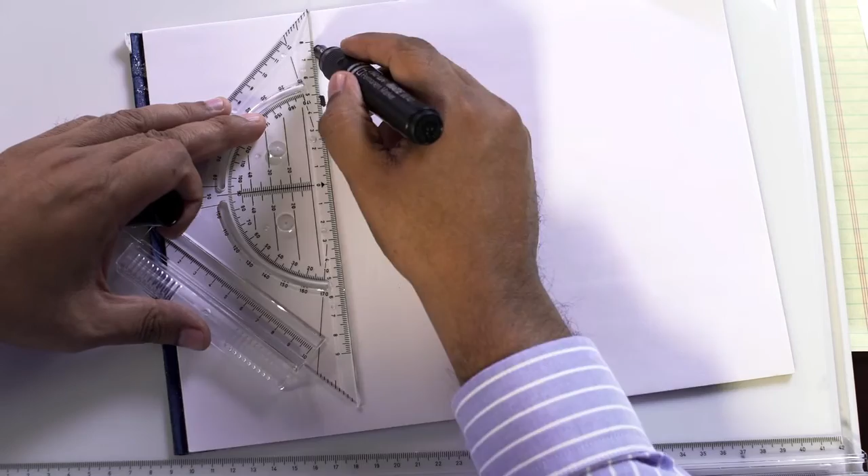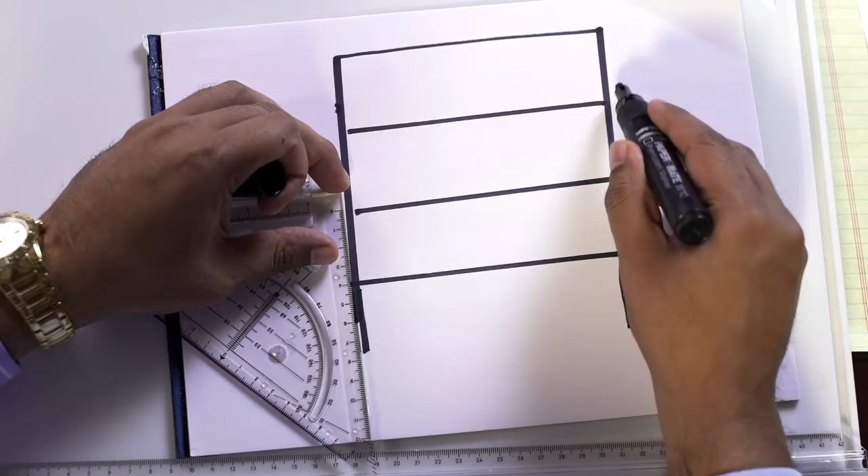If we take a look at a 3-story structure, which is normally like an apartment building or condominium structure, with 3 floors, and on the very bottom floor, which I'm calling the ground floor or first floor, that would make it a 4-story structure, but 3 stories above the ground floor.

The top 3 floors will have windows and doorways, and the bottom floor is usually what they call tuck-under parking. Tuck-under parking, which many of you are familiar with—you probably live in some of these buildings—is when the cars are parked underneath the structure.

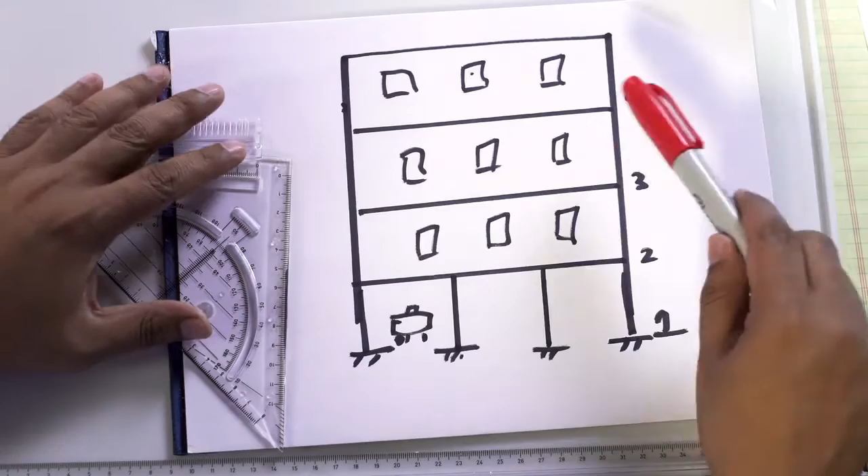Now the problem with this, what it creates, as you look at this diagram, is that you have a stiff structure on the top 3 floors, but on the lower floor you have these, I'll call them skinny columns. These skinny columns don't provide the same stiffness as the upper 3 floors.

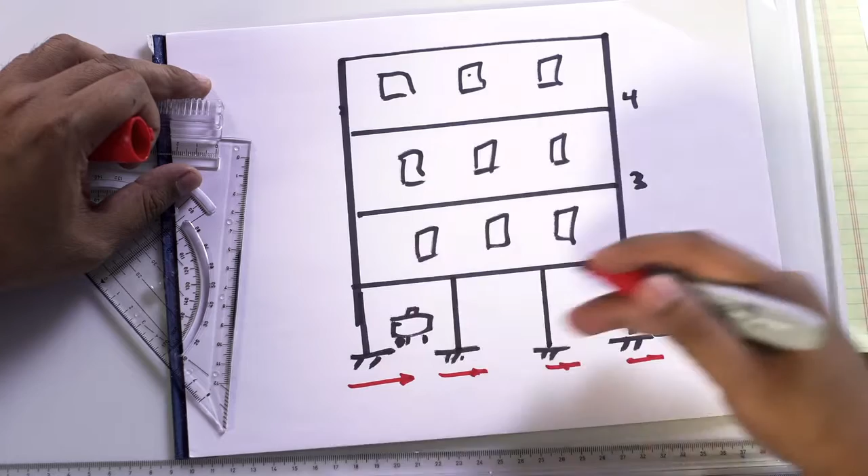So what happens is when we have an earthquake, using my red arrows here, and the ground shakes, this entire structure is going to deflect. When it deflects, all of these loads from the upper floors get transferred down to these columns. These columns don't have sufficient strength to carry those loads.

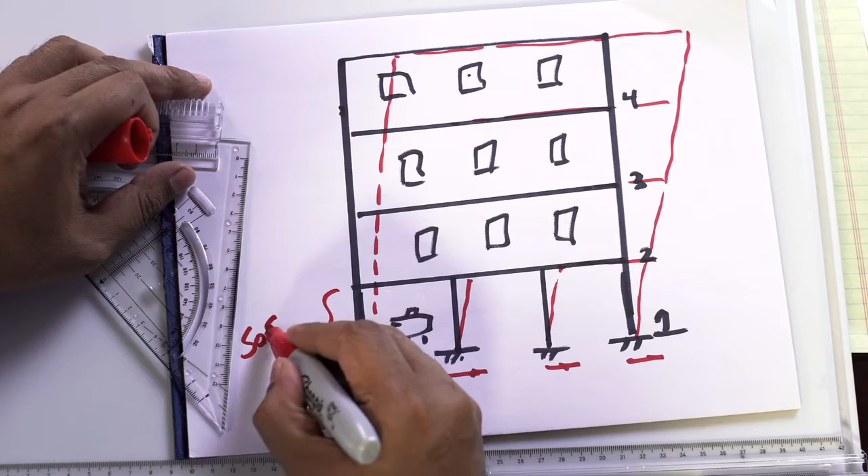This is the soft story. And what happens when you have a soft story? We've seen plenty of examples of them. It can be quite devastating.

It was a tuck under parking, and the upper 3 floors collapsed and crushed that tuck under parking. 16 people died at Northridge Meadows apartments. So soft stories are very, very dangerous.

We also have a very interesting video done by the Japanese Research Center, which tested 2 buildings, one with a soft story condition and one with a retrofitted soft story condition. Let's take a look at that video.

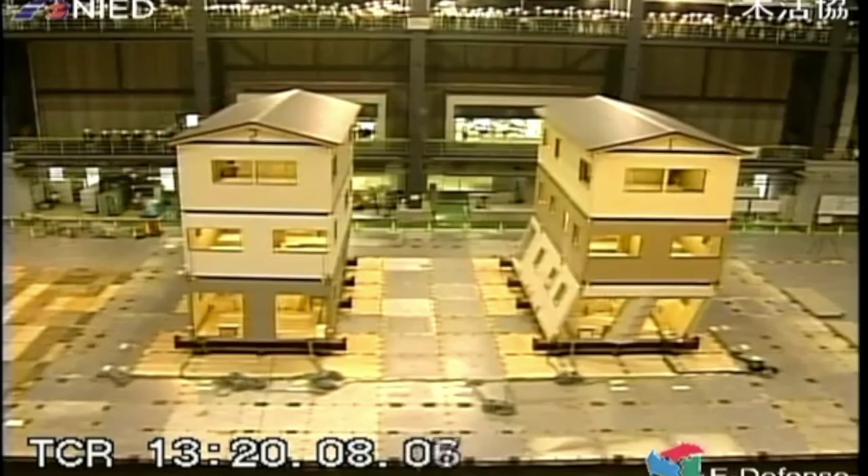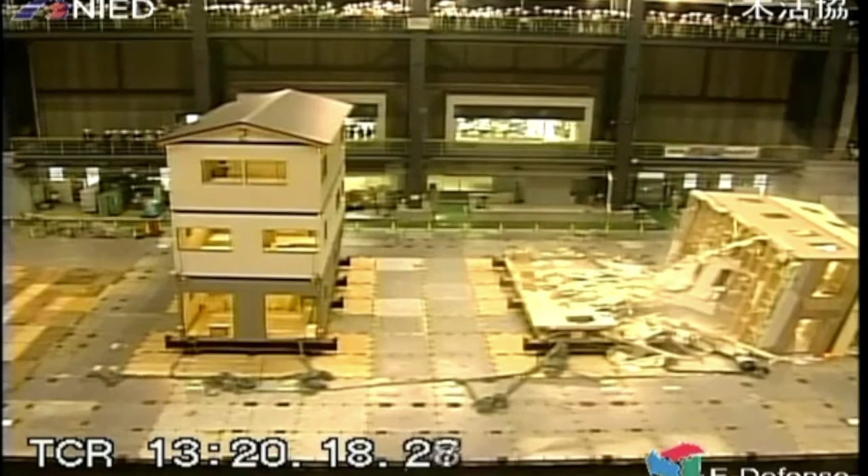So you can see from the video what happens in a soft story condition. The building with the soft story condition was a total collapse and it actually rolled over. The building that was retrofitted survived.

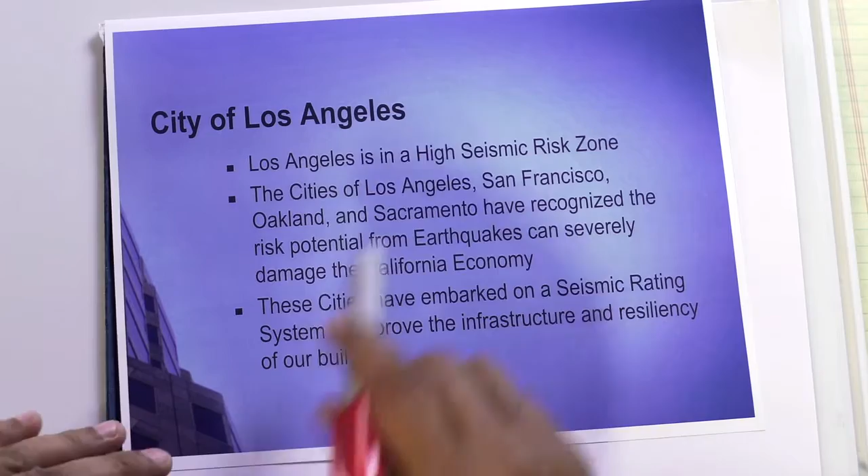So the city of Los Angeles is identified as a high seismic risk zone. We know that. We live in a seismic risk zone. We have thousands of faults. We have, on average, 2,000 to 3,000 earthquakes a week in Los Angeles, out of which maybe 99% of them are undetected because they're less than magnitude 3. But this is a very high seismically active zone.

So the cities that have critical seismic zones, which includes Los Angeles, San Francisco, Oakland, Sacramento, recognize this as a risk and collaborated together to develop the soft story ordinance. And so they have embarked on creating a seismic rating system and an ordinance requiring building owners that have this potential risk of collapse to retrofit their buildings.

It's a safety measure. The City of LA created the safety measure, and it's called the LA Seismic Retrofit Program, the Los Angeles Seismic Retrofit Program. And this handout, which is available — you'll see the link up on the screen — gives you the basic parameters and also tells the tenants in buildings like this.

With over 15,000 buildings affected, it's a fairly drastic ordinance. The timeline for implementing the ordinance is approximately 7 years. Let's go over the timeline.

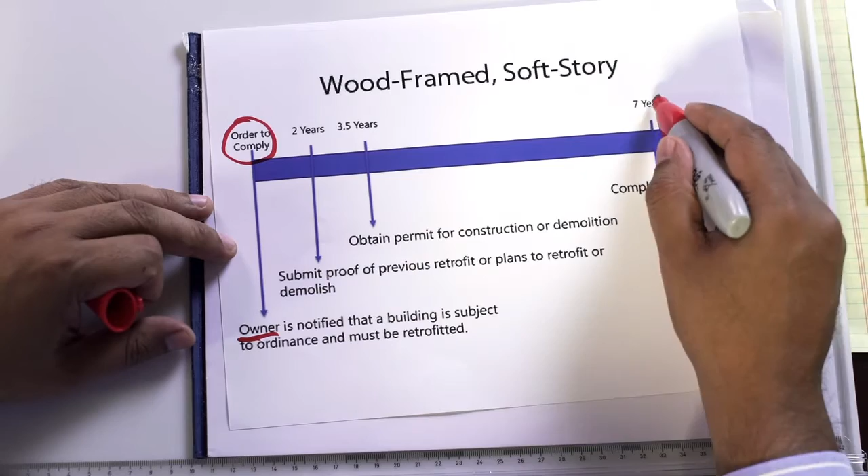So the building owner has, from the date of the order to comply, which is when they get the notice, 7 years to comply with the ordinance. In the first 2 years, they have to submit proof that they have hired an engineer and that they're in the process of retrofitting their building.

And the city's quite serious about this. The city will issue the order to comply, and building owners that don't comply will be subject to penalties. So it's a mandatory ordinance, and the tenants will be made aware. Order to comply will be issued, and it will affect the title of the property. So as a building owner, you've got to comply.

And that's what we're going to talk about today. We're going to talk about how to comply, the cost of compliance, and the different options that you have in order to meet the compliance.

Just as a matter of interest, so that I keep your interest throughout this course, I want you to think about this question, and I'll give you the answer at the end. Which is the safest structure best designed for earthquakes, tornadoes, hurricanes, nuclear attack, and terrorist attack? We have different classifications of structures: residential, commercial, hospital, police stations, fire stations. Think about that — I'll give you the answer at the end because I want to keep your interest. I'll tell you the safest type of structure available in the commercial space. We'll come back to that later.

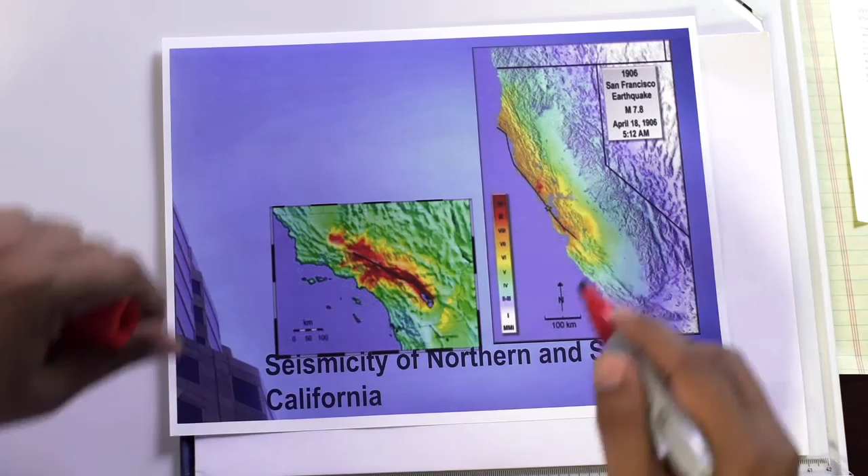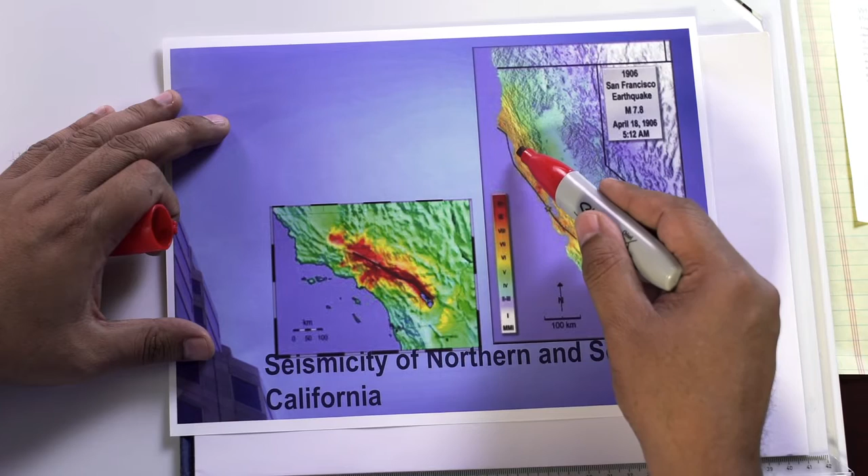So when we look at the seismicity of Northern and Southern California, we are in a high seismic zone. On the diagram here, you can see the San Andreas Fault, the red zones indicating the areas of highest seismic risk. That San Andreas Fault runs all the way from Southern California up through the Bay Area, cuts right through the center of the Bay Area, and then goes off into the ocean, where it keeps on going all the way up to Alaska.

The area south of the Bay Area, going all the way down from San Francisco to Los Angeles through Palm Springs, is one of the most seismically active zones in the world. There are literally millions of homes affected along that San Andreas Fault. We are only referring to, in today's lesson, the City of LA ordinance, but remember Los Angeles County has 88 cities, which are all in the same seismic zone, and many of those other cities will also be looking to implement a similar ordinance.

So this is going to be going on for some time, and this is the reason I wanted to post this session — so that I could help the public understand these issues and the technical challenges involved in complying with the ordinance and making your building safe. Why did they pass the ordinance? Well, obviously life safety is the #1 priority.

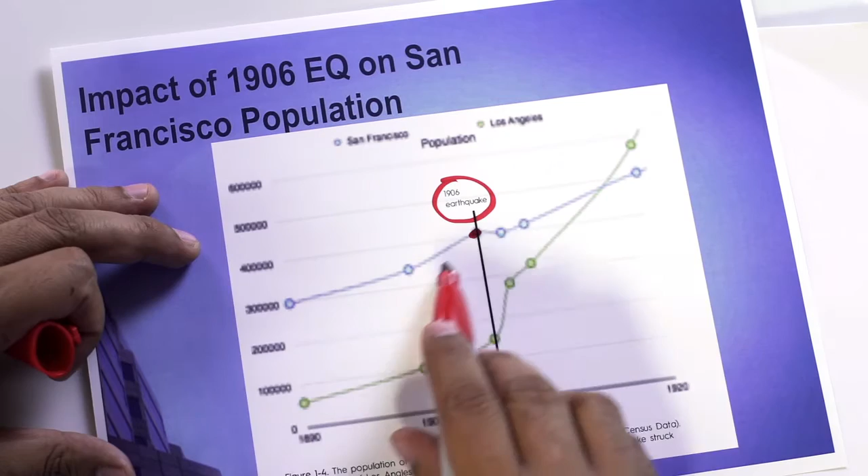The same thing happened in California in 1906. If we go back more than 100 years to the San Francisco earthquake, and look at this chart, you'll see that in 1906 San Francisco, shown by the blue line, was the most popular destination in California, not Los Angeles. Everybody was moving to San Francisco. Los Angeles wasn't even a third the size of San Francisco.

But when the 1906 earthquake occurred, San Francisco was wiped out, and it flipped the dynamics for the state of California. Southern California, Los Angeles took off, and San Francisco, to this day, more than 100 years later, has never recovered from that impact. So this is a very serious business.

It affects not just Los Angeles, it affects the entire state of California—Los Angeles, San Francisco, Sacramento, and the entire economic hub, with California being approximately the 7th largest economy in the world. It's a very, very serious matter.

So what are we going to do about it? I'm going to show you a couple more examples here, and then we're going to get down to the details. These are also examples from the Northridge Meadows apartments.

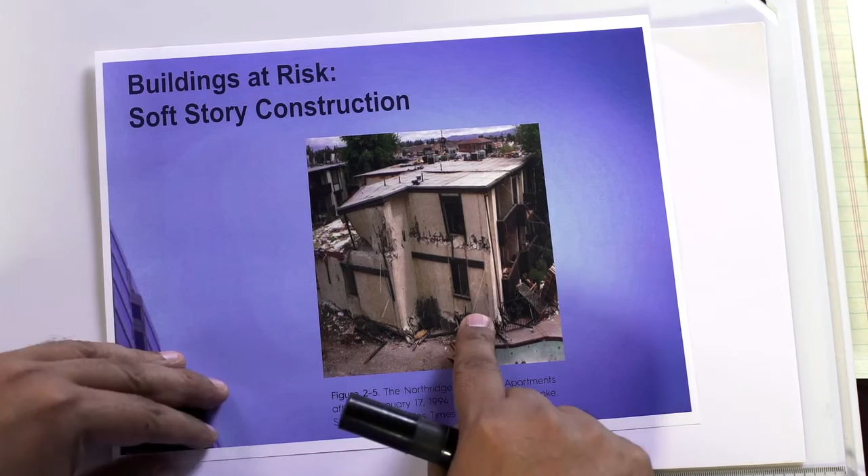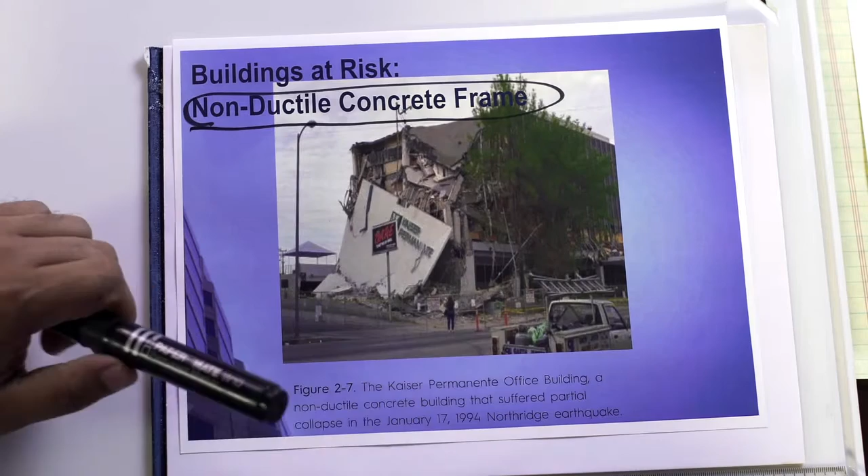There's another part of the ordinance which covers another type of building, called the non-ductile concrete frame building. We won't be talking about that today. That affects approximately 1,500 concrete buildings highly subject to earthquake risk. This will be the topic of another class—we'll pick it up next time, but that's another part of the ordinance that has also been passed. We'll save that for another day.

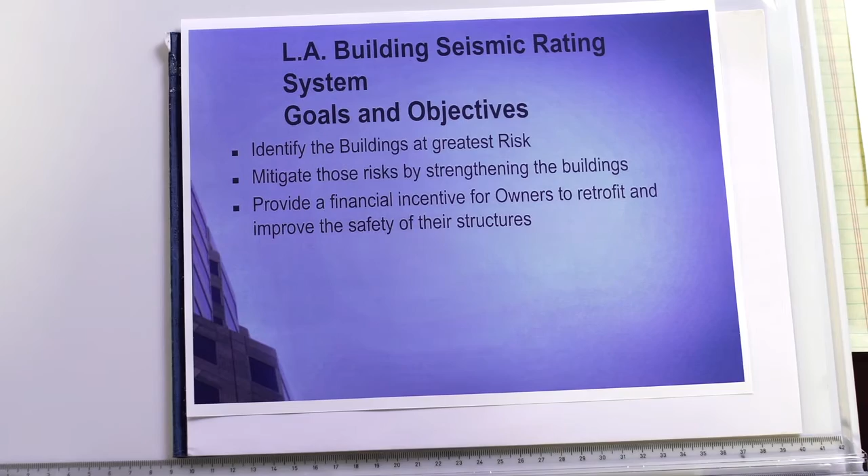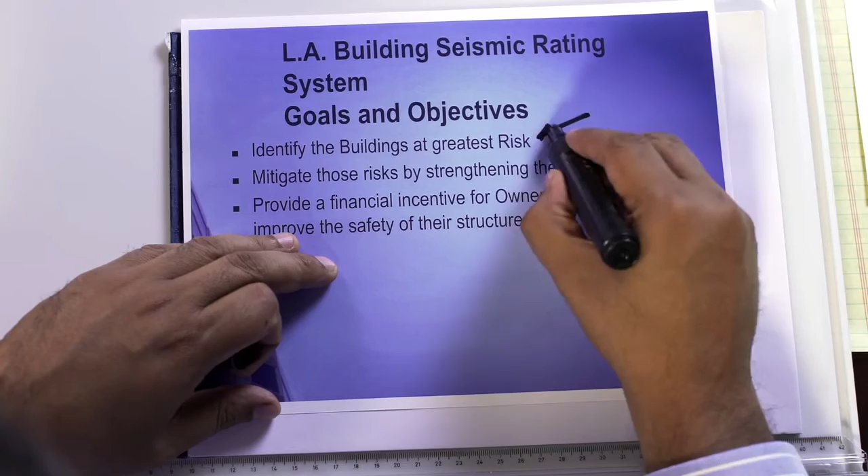So what are we doing in the LA Softstory ordinance? The first thing we want to do is identify all the buildings at the greatest risk. This step is being done by the City of LA—they are the ones going around identifying those buildings and then issuing orders to comply. When the owner gets the order, they then have to mitigate those risks by strengthening the buildings.

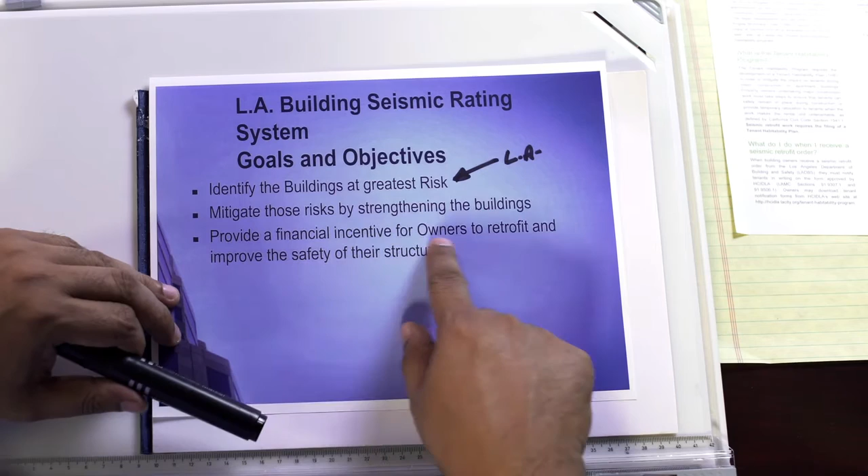The city is also trying to provide some financial incentives to building owners to help finance this or create tax benefits. That's a separate topic, outside the scope of this presentation, but there are some financial incentives out there. We're going to focus on this topic: how to mitigate. What do we do? How do we strengthen the building?

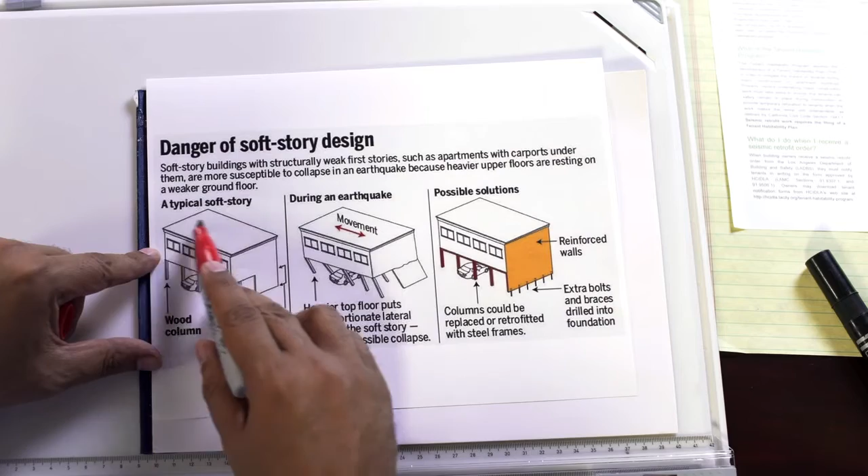Here's a great sketch, courtesy of the Los Angeles Times, which explains nicely in 3 dimensions what the danger is of a soft story. On the left you can see a building with a pretty robust second story resting on weak columns. This is very common in Hollywood and Santa Monica—many of you are probably living in these buildings. When you see this type of framework, that is potentially a soft story and a collapse hazard.

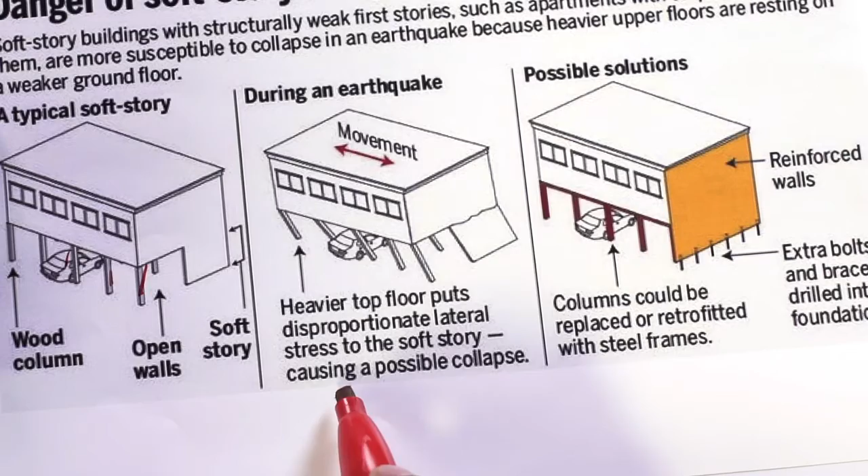In a fairly moderate earthquake, that entire building will collapse. You can see that illustrated in the second portion of the figure, which shows that under lateral movement, that entire floor will come down. And obviously, if you have 2 or 3 or more stories up there, in a densely populated city like Los Angeles, the risk is even higher.

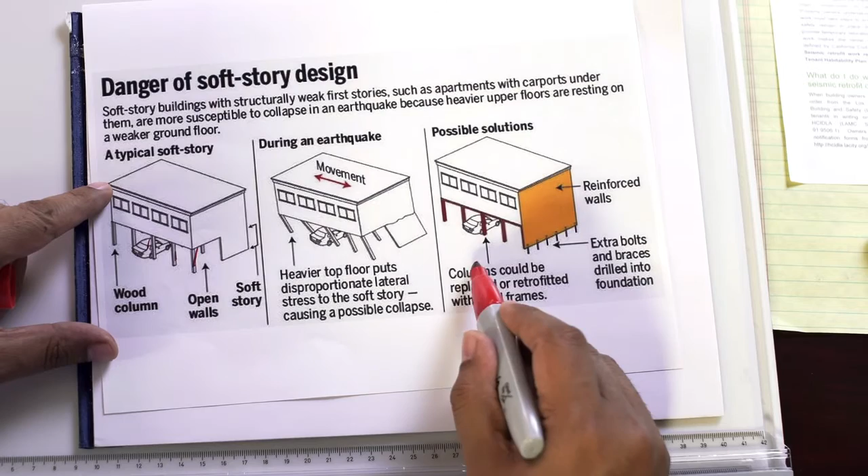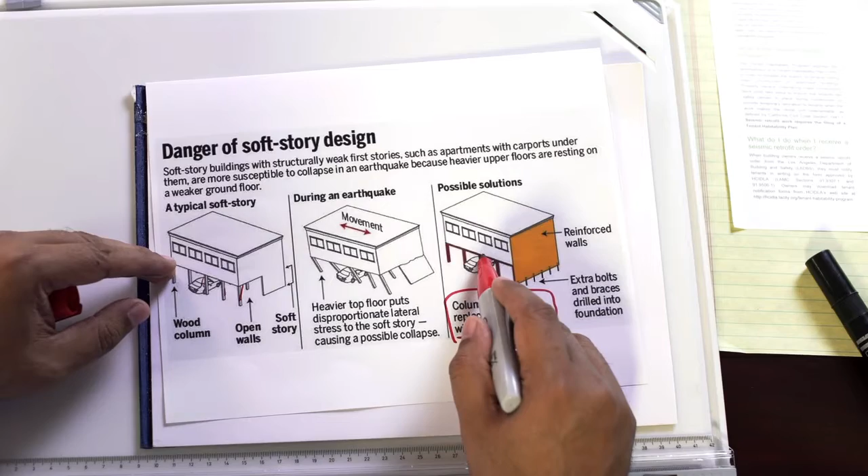So what do we do? The solution focuses on using strengthened columns—either steel columns, moment frames, or possibly shear walls—to strengthen that lower floor so it doesn't have a weak stiffness line and doesn't collapse. So what we're doing is taking these existing columns and either replacing them or upgrading them.

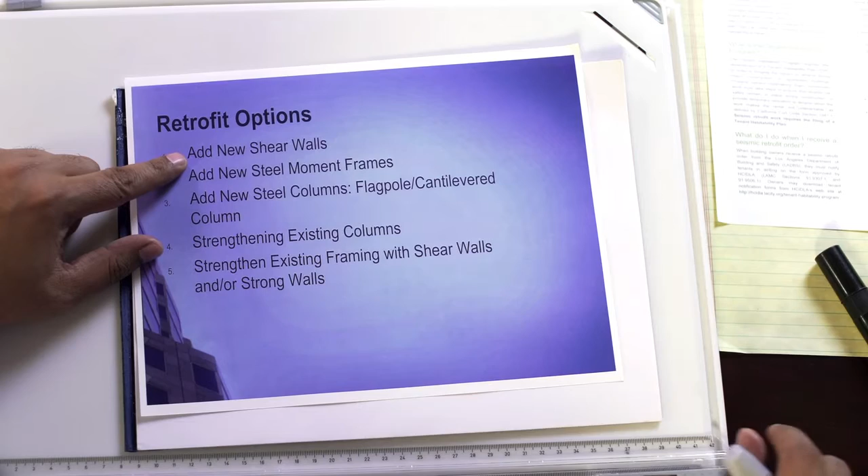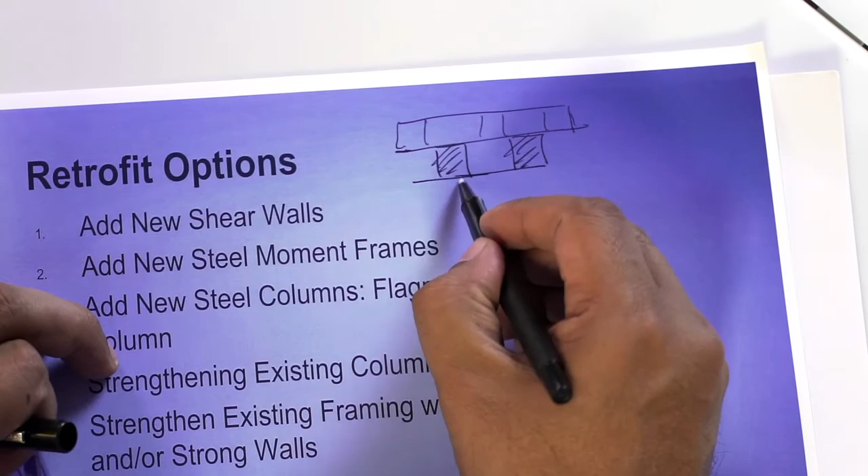So what we're going to do is come in with our solutions. Here are the options. One option is to add new shear walls. A shear wall is essentially a wall that comes in to supplement the stiffness on the ground floor, with your upper floors up here, and that creates higher stiffness. It's basically strengthening using a wall.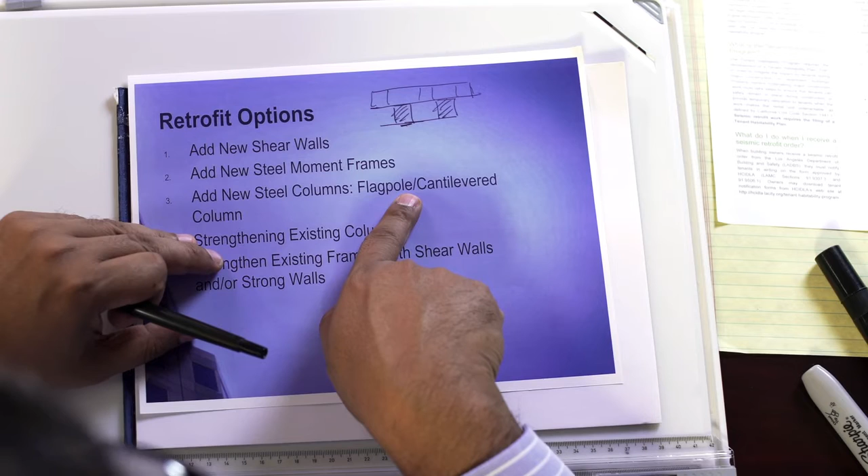Another idea is to use a steel moment frame, which we'll talk about in a second. We can also add new steel columns, which we call flagpole or cantilevered columns. We can also strengthen the existing columns—if it's already steel, maybe we don't need to replace it, maybe we can strengthen it, box it up and create a tube. We can also strengthen the existing framing with shear walls and/or strong walls.

So here you have five options, and it depends upon your structure, what the logistics are, and how many floors there are. The first step is to examine the structure, do a feasibility study, and try to see which option is the most cost effective.

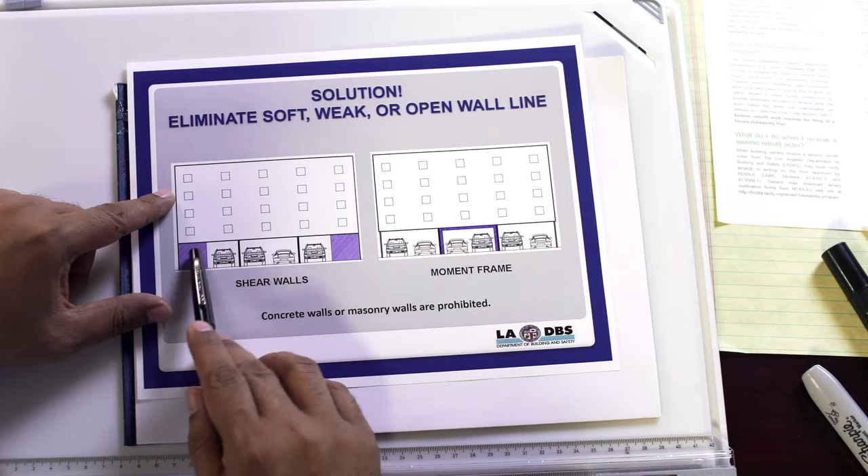For example, let's say we're looking at a hypothetical example: four stories over a soft story. In this example, two solutions—one is to put in two shear walls, the other is to put in a single moment frame. What's the problem with the first one? It's most likely going to be cheaper, but the problem is, as you can see, you lose parking. That's the problem with shear walls.

They take up the parking, and no tenant likes to lose their parking. As of right now, parking is sacred property in Los Angeles. Nobody wants to give up a parking space. So usually this is not a viable option unless you happen to have an apartment building with excessive parking. I haven't seen it, but I'm sure there's a few out there. So usually I don't recommend the first option, or it's not going to be accepted by ownership.

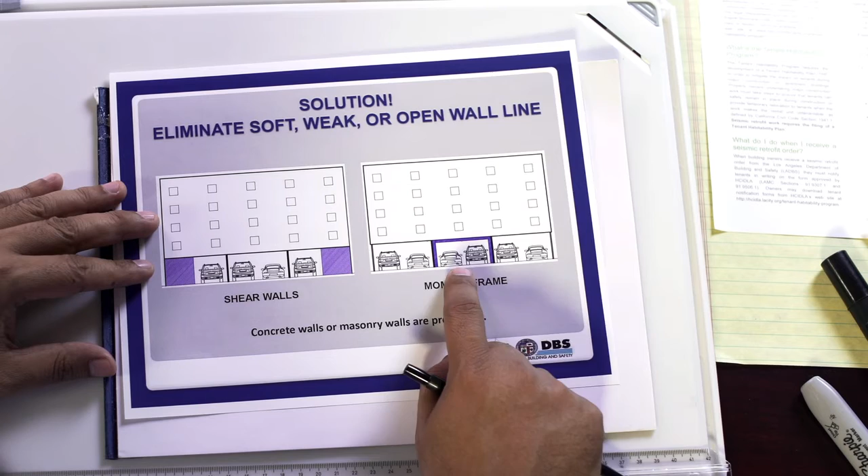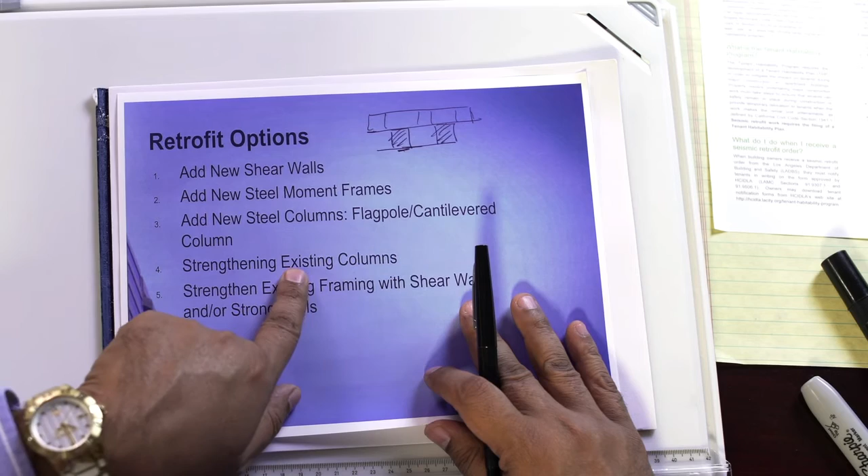The second option is a good one, but I want to go into the details of putting a moment frame in—it's a lot more involved than just what this drawing shows, and we'll explain that in a moment. Going back to our other retrofit options, we can also put in steel columns, which we call the flagpole, or strengthen existing columns. Let's talk about the steel moment frame.

Steel moment frame gets a lot of attention, and I want to explain what it is. A steel moment frame is a combination of columns and horizontal beams that are rigidly connected at the joints. What do we mean by rigidly connected? Let me try to explain that with a simple sketch.

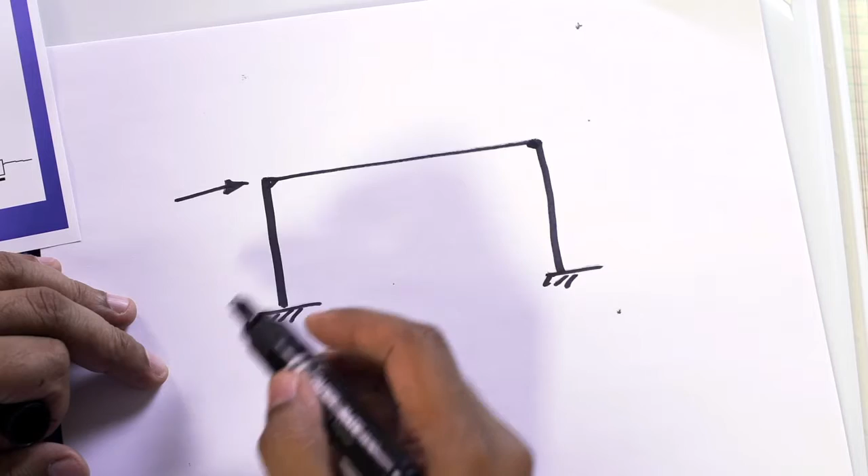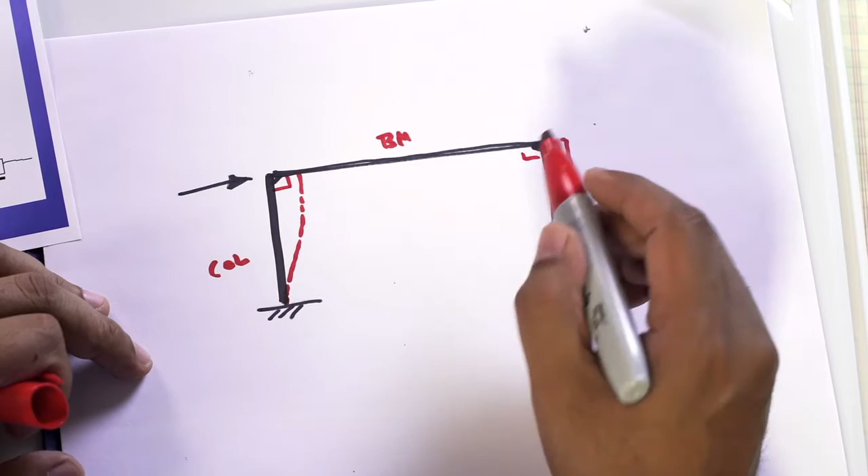If I have a frame made of steel, and I apply a load on the side, if these are rigid connections—which they are supposed to be—and everything is made out of steel, when this deflects, it's going to deflect in a way that the angle between the beam and the column always remains at 90 degrees. In other words, there is no rotation. The fact that there is no rotation means there's a very high bending stress occurring on those beam-column joints.

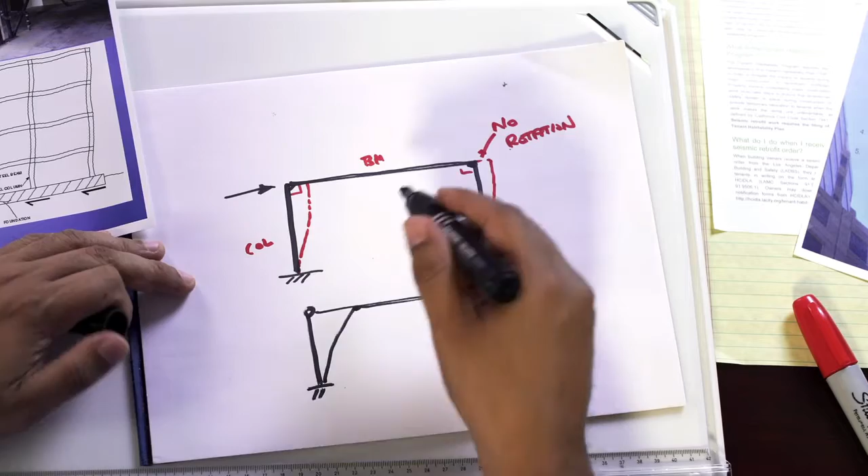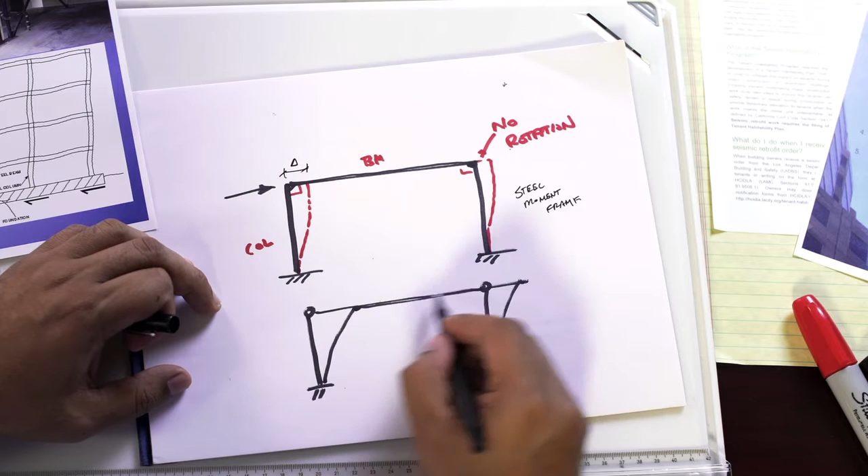As opposed to a hinged connection—if we allow rotation, the frame would deflect like this. Then it's no longer a rigid frame, it's pinned, and it will deflect like this because it's allowed to rotate. What's the difference between the two? This one, a steel moment frame, will have a shorter deflection—it's much stiffer. This one, without a moment frame, is a cantilevered column, and will have a higher deflection. It all depends on whether or not the building can tolerate the higher deflections.

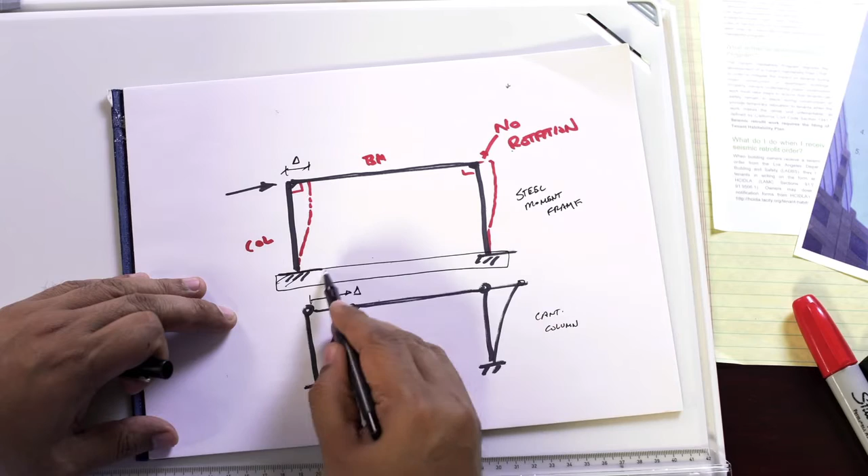The steel moment frame requires a grade beam that has to be dug inside. There's a whole concrete beam that has to go in there. And this connection is a very, very detailed connection. It requires welding, it requires bolting. It's more expensive, but it's the best solution, I will say that. From an engineering standpoint, you can't beat a steel moment frame, but it is also more expensive.

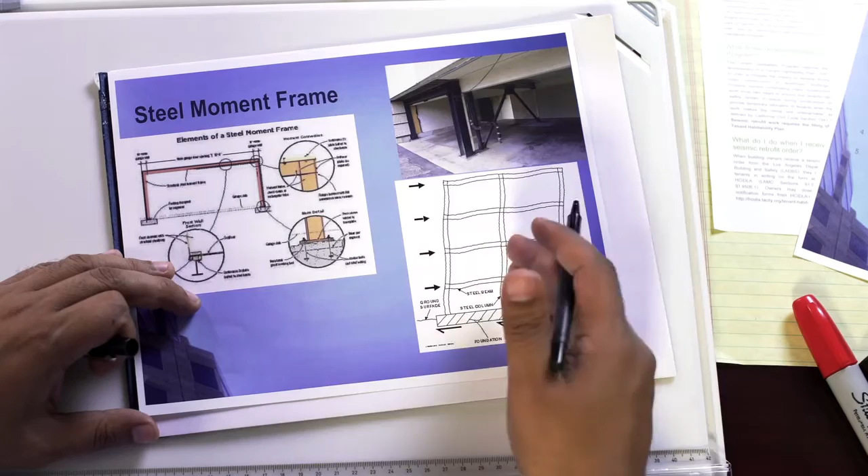The cantilevered column, shown on the bottom, can be designed with a footing. It's a cheaper solution, in my opinion, easier to install, but it has less stiffness. Now the question is, in terms of stiffness, what do you need? If it's only a one-story building, we may not need a steel moment frame. Maybe we can do a cantilevered column. So there are multiple options.

And the same thing applies when we go to looking at these other choices. So let's look at the wood shear wall.

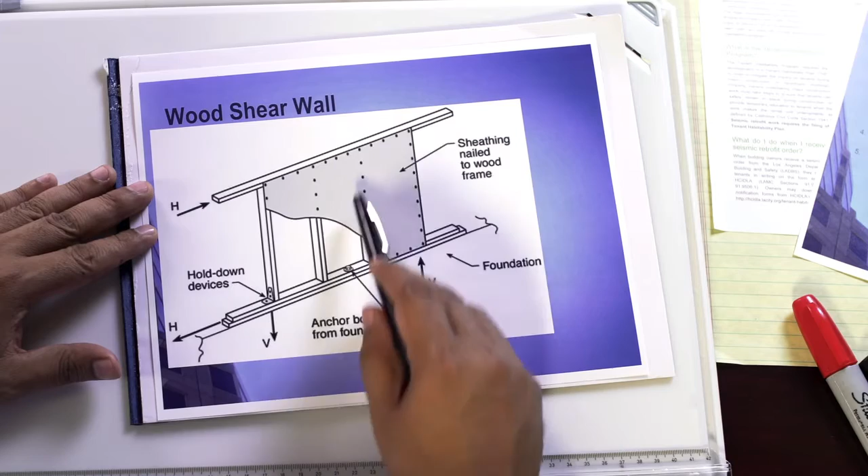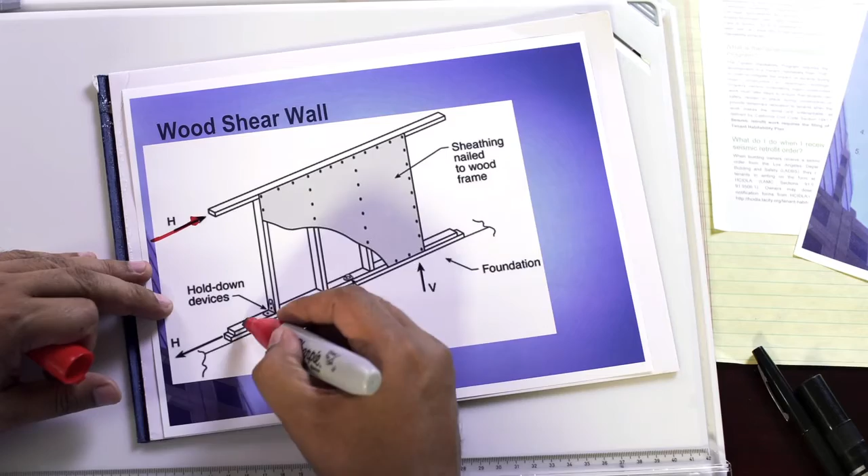A wood shear wall is essentially a system of studs with a top plate and a bottom plate with plywood sheathing. What does a wood shear wall do? When you put the plywood sheathing and apply this force, the plywood sheathing, which is nailed to the stud, prevents the shear wall from deflecting. It's as simple as that. If you didn't have the sheathing and just had the studs, the wall is less stable. You apply the load, the studs will just bend. But when you put the sheathing on, it ties it all together, creates a panel. And that's what a shear wall is.

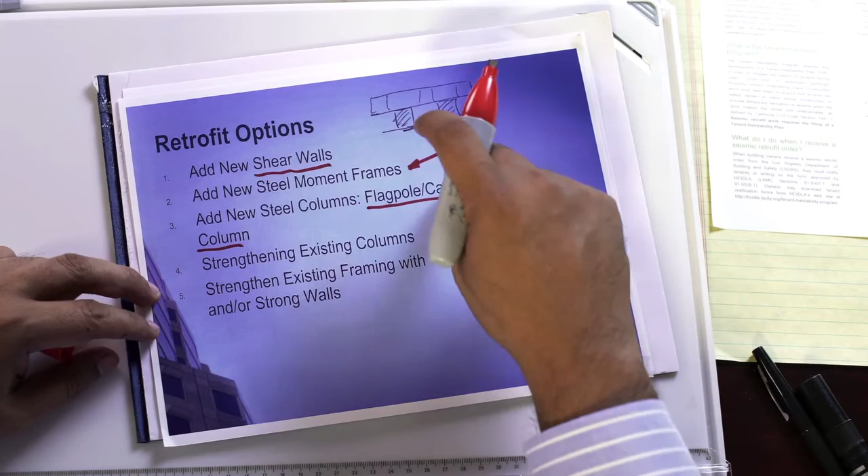Shear walls versus moment frames, which ones are stronger? No question, steel moment frame, much stronger. Shear walls are the weaker. The flagpole, the cantilevered column, is equivalent to a moment frame, definitely stronger than a shear wall, maybe a little bit more expensive. What about the fourth option, strengthening existing columns?

What do I mean by that? Let's talk about that for a minute. So let's say your building has some steel columns already in place. Usually those columns will be in the form of I-beams. They'll look like this. So maybe when we look at your building, we find that the steel columns are already there, but they're not big enough.

Well, we can come in and weld new plates on the side of that steel column. We can also weld new plate on the stronger side, and we can box that in and create a new column, which is much stronger than the original column. So it's more than one option, and maybe the strengthening of the existing column works.

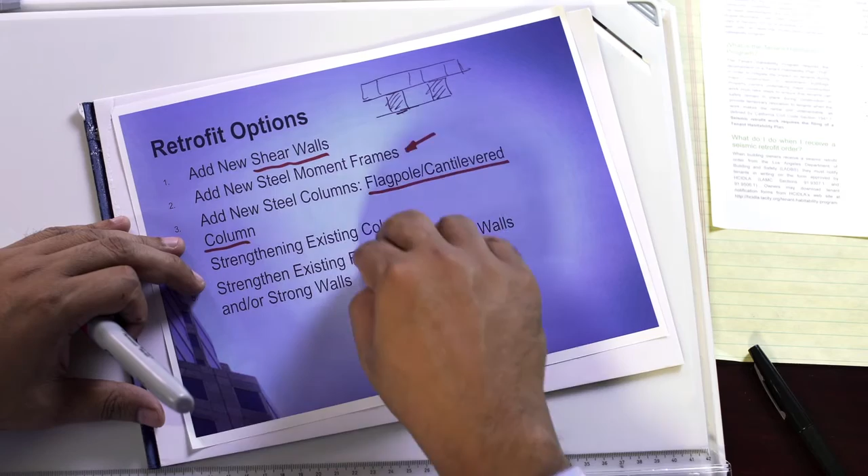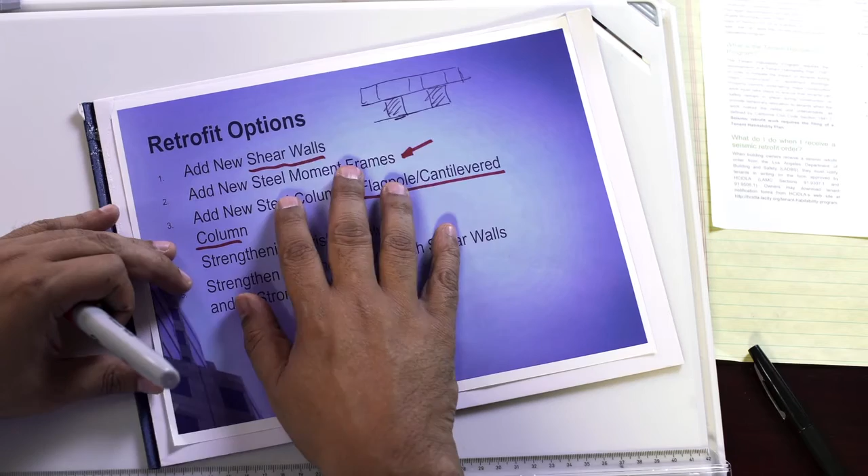Again, there's no one solution, there's multiple solutions. They apply to different cases, and the job of the engineer is to give you those choices and help you decide as an owner which one you can afford. I don't like to take 5 options and tell my client that they should do only one. I like to present maybe not all 5 options, maybe only 2 or 3 that I think are the best, and then let the client make the decision, because after all, you have to decide what you can afford. But I'll give you the best 3, and then you make your choice.

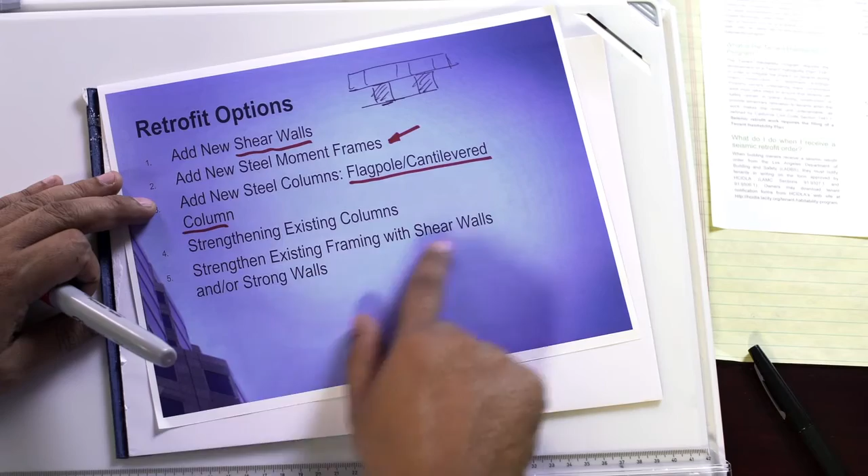The other option on the list is the strong wall. So we can also use adding a strong wall. What is a strong wall? A strong wall is essentially a shear wall, but it's a proprietary shear wall developed by a specific manufacturer, which has a super high strength and it's not as long.

In other words, this distance here can be as short as 2 feet. It can be as short as 18 inches. I think they even go down to 12 inches. So what does that mean? It means that if you have 12 inches to work with, you could possibly put in a strong wall. But as you saw with some of the slides we looked at, 12 inches may sound like a lot - it's about a foot - but you may not have a foot. In some cases, some of these columns are only 6 inches wide.

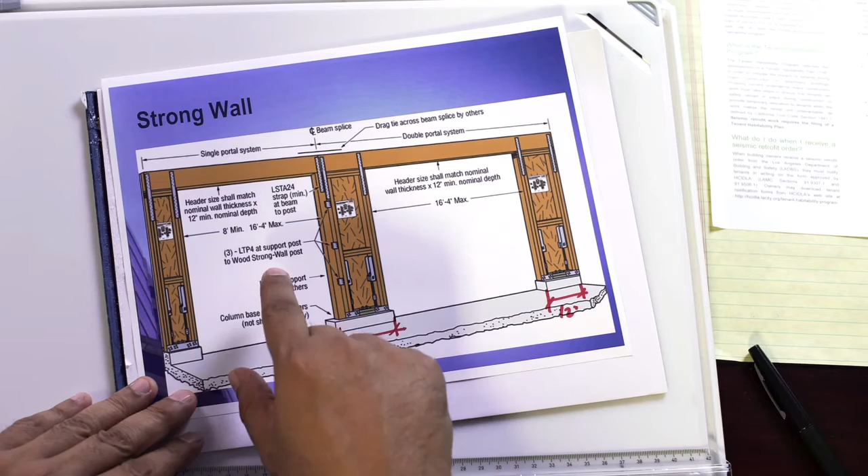If I put in a 1-foot strong wall, what have I done to my parking? I've lost my parking. And again, parking is a sensitive matter. So strong walls can be used in certain instances where if you have the length and you can do it, then by all means it should be considered. But if you don't, then you have to go with the steel moment frame or the cantilevered column.

So here's the question I get all the time. Every owner comes to me and says, give me a price. How much does it cost? I get this question all the time. And my answer is, it depends. I can't give you a cost. We first have to do some sort of analysis.

We have to do a step 1. I emphasize that because my role in this process is as an engineer, not a contractor. I mean, I am a licensed contractor, but I don't practice construction. My job as an engineer is to evaluate the building and give you your best option. Then you can go get the contractor of your choice, or I can recommend somebody who can give you the price. There are 2 ways you can proceed.

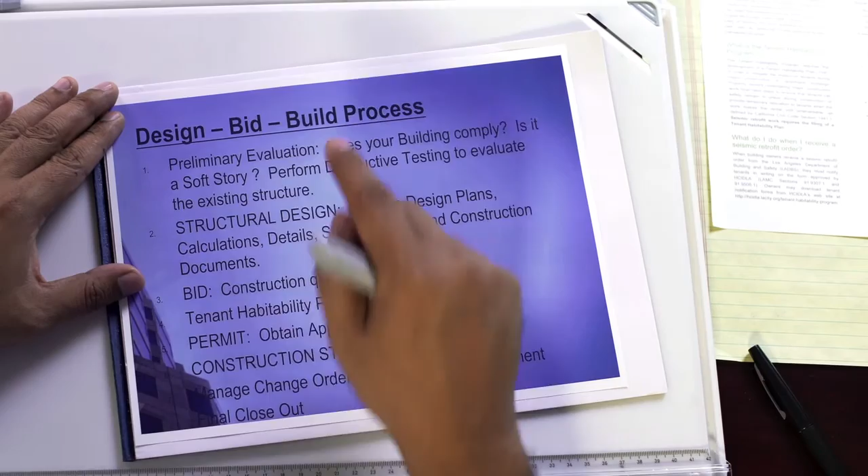The first way is what's called the Design-Bid-Build process. This is the traditional way. In the traditional way, step 1, we do a preliminary evaluation. Does your building comply? Maybe your building already complies. Just because they gave you the notice, it doesn't mean you necessarily have to do something, because it just means they're letting you know that you need to examine your building.

Is it a soft story? We have to do some destructive testing. We have to come out to the building. We have to cut some stucco. We have to see whether or not the columns are steel or wood. So we have to do some evaluation unless we have a set of drawings.

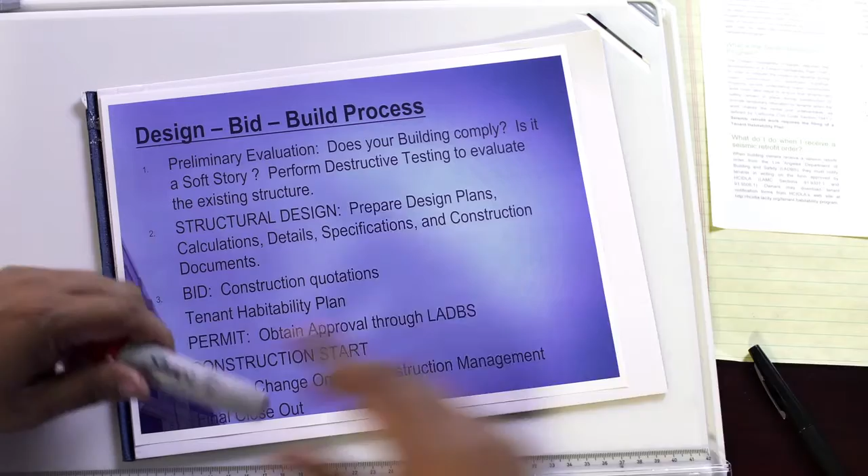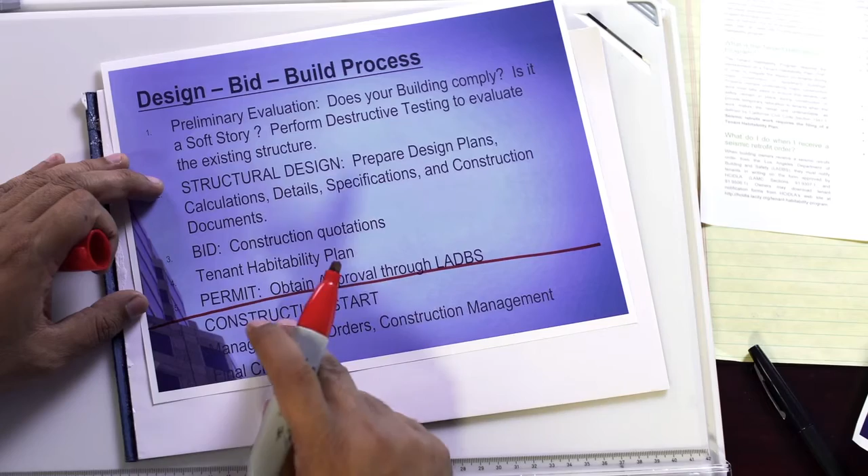Then we have to do some calculations. We have to see, going back to the 5 options, which one is going to work. Is there a 6th and a 7th option? So we have to do some engineering. We have to evaluate. Then, after we do the evaluation, you can come up with a cost. And then you can develop your tenant habitability plan, pull your permit, which we will help you with. At this point is where you retain your contractor and start with steps 6, 7, and 8, which is to engage the contractor and let the contractor go do what they do, which is to build it.

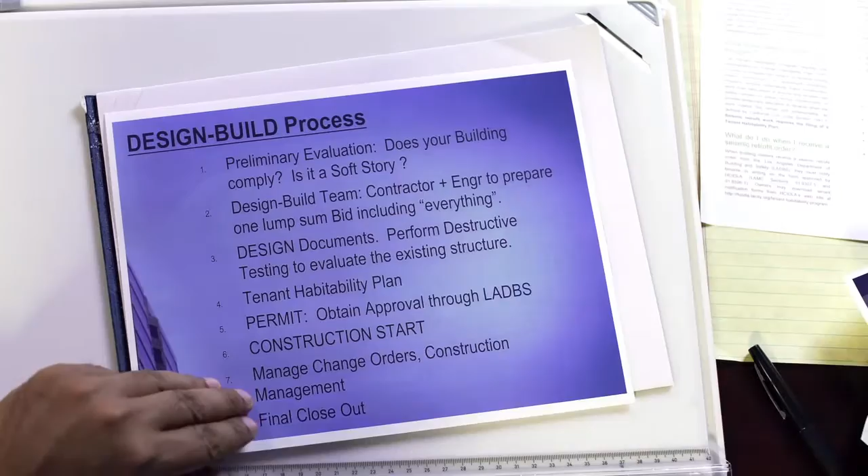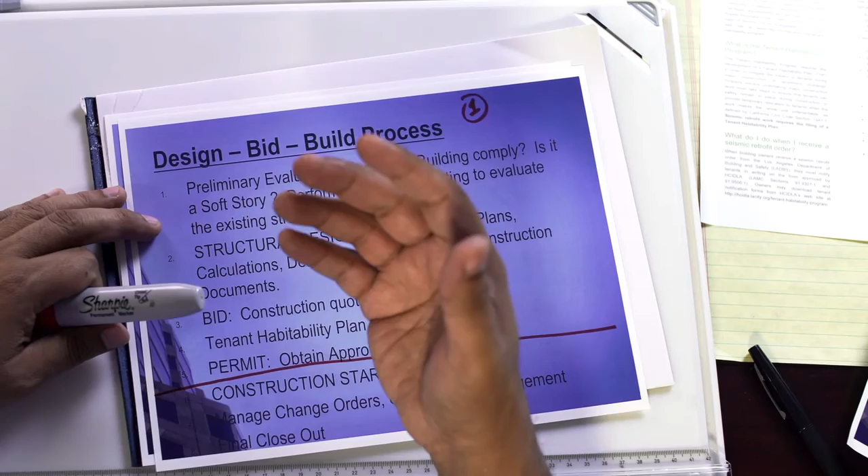This is the preferable option. This is what I recommend, option number 1. Option number 2, another choice. Some people don't want to take the steps of doing the evaluation, the structural design. Some people want a price, and they want it done now. So there are some companies, we call them design-build companies. This is called the design-build process.

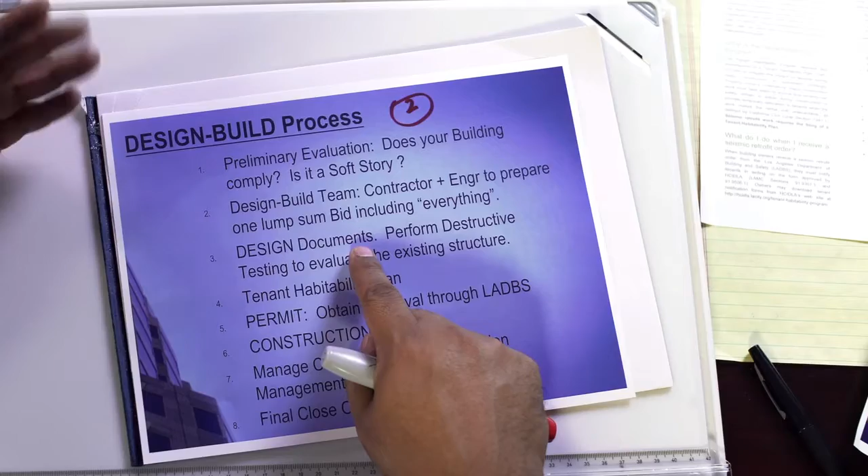The design-build process: they will do some sort of preliminary evaluation, but now the contractor steps in at the very beginning, and the contractor will bring in an engineer to prepare a design. So the initial steps of evaluation and looking at options is eliminated for the most part, and the design builder, the contractor, will then just come to you with one option, one price, and say, that's our price, that's our solution. And they will go straight to design documents. It's definitely a faster procedure, but my advice to you as owners and tenants is that you are then disengaged from the different choices. Sometimes this will work.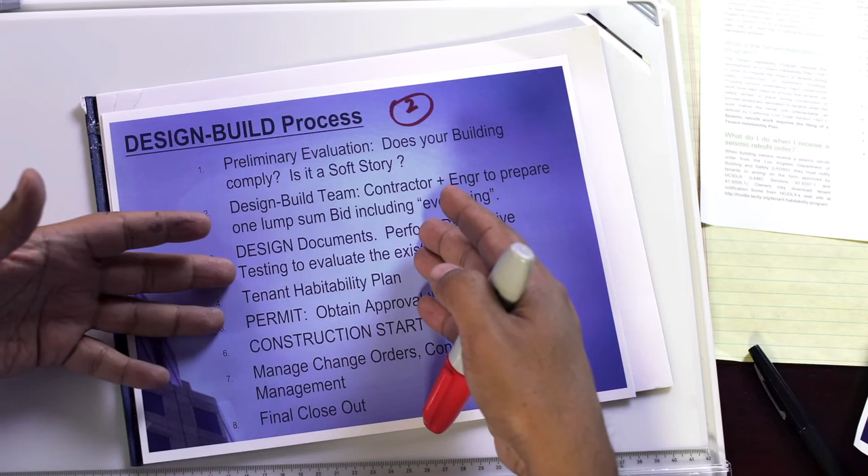I'm not saying it's a bad option. We've done it, we work with contractors, but I want you to be aware of the two choices, because there are a lot of people running around town who are offering only the second option. I want you to know there is a first option, and that you should, if you want to economize and create the maximum benefit, at least be aware of it. Again, you're the client, you're the owner, the decision is yours in the end.

What are the pros and cons between design build versus design bid build? Design build results in one price, but you can have change orders that may exceed the original budget, because in design build they may not have done the destructive testing. They may not have evaluated all the different intricacies involved with the plumbing and the electrical. In design bid build, it allows you to control the construction with better plans, design documents, and you control your budget.

I would highly recommend, especially for those with more than 20 units, get a construction manager. Don't try to do this yourself. This is not like adding flooring on your balcony or changing your sprinklers or doing plumbing in your bathroom. This is serious stuff. Get a professional. Get a construction manager to represent you. It costs a little bit more, it's a little more expensive, but he's a professional and he will represent you, and help you manage your budgets and your schedules.

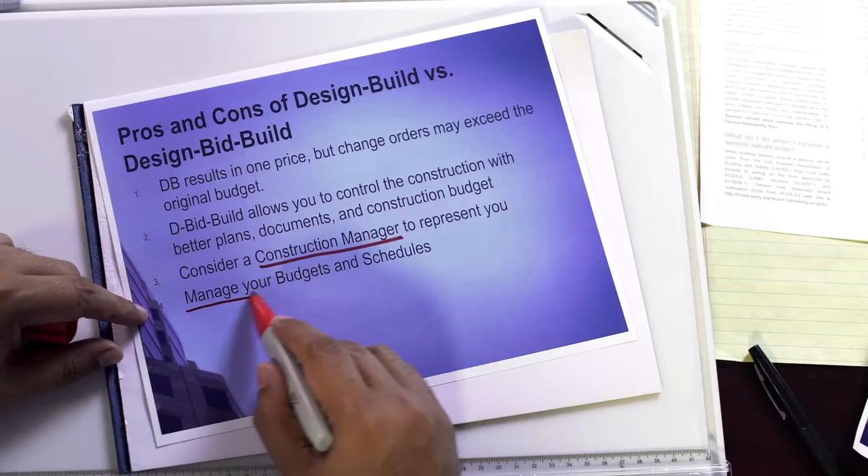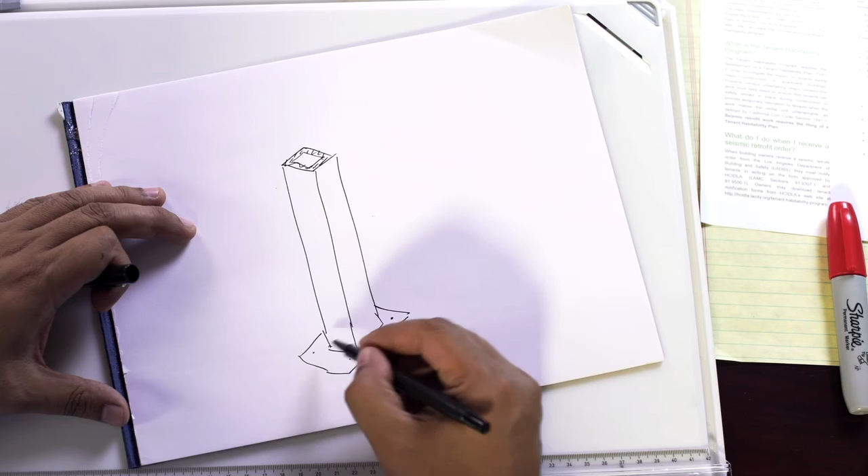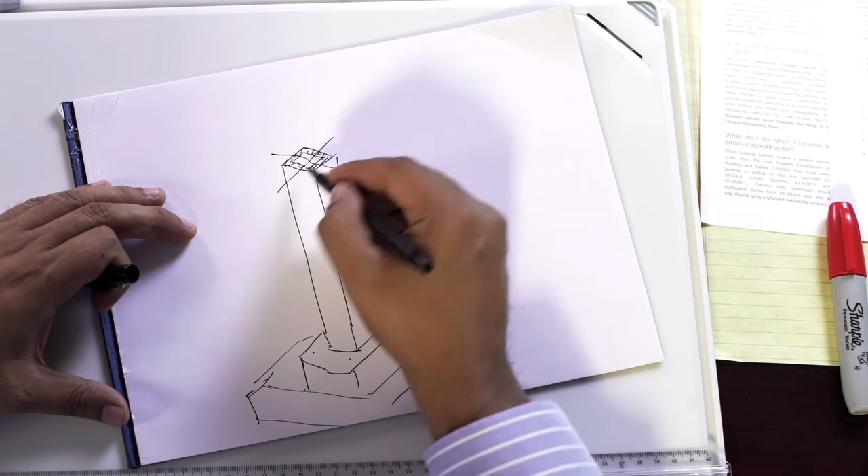So let's talk a little bit about the cantilevered column solution. What I like to use is what's called a structural tube. A structural tube is exactly what it says: a steel tube which is then connected down at the base with a steel plate with bolts that go into a concrete foundation. Why do I like this solution? Because the structural tube can take loads in both directions. It has symmetry.

It has symmetry, so when I do a design, and let's say I recommend an 8-inch by 8-inch by half-inch thick structural tube, I like that solution because I get strength in two directions. As opposed to doing an I-beam, a lot of people use the I-beam. The I-beam is strong about one axis and weak about the other axis. It does not give you the same strength in both directions.

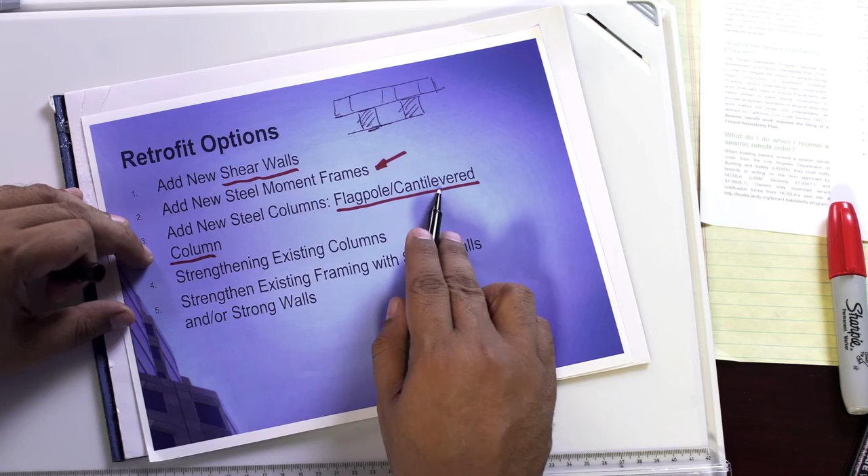So this is called a cantilevered column. It is one of the solutions we talked about earlier, the flagpole cantilevered column. Remember that you don't have to replace the column, you can also add the column and leave the original column in place.

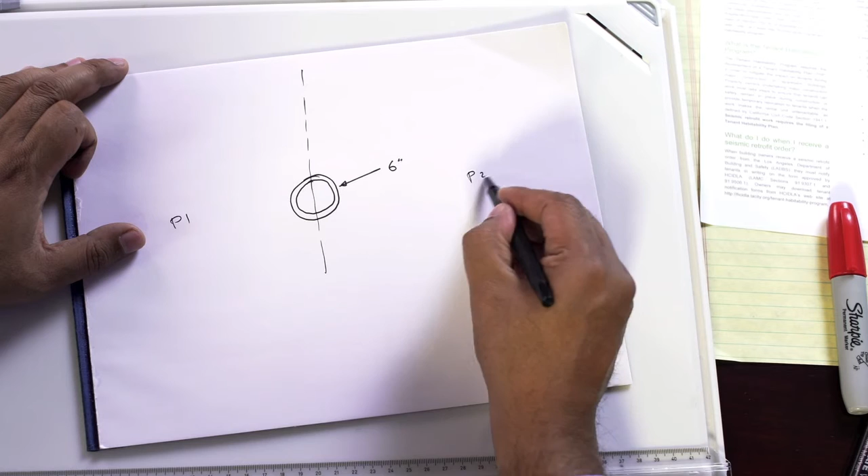The only problem with that is, let's say your existing column is a 6-inch pipe column, and here's your parking line, so you have a parking space here and a parking space here. If I take that column out and replace it with an 8-inch column, I'm only impacting it 1 inch on both sides. That's pretty livable.

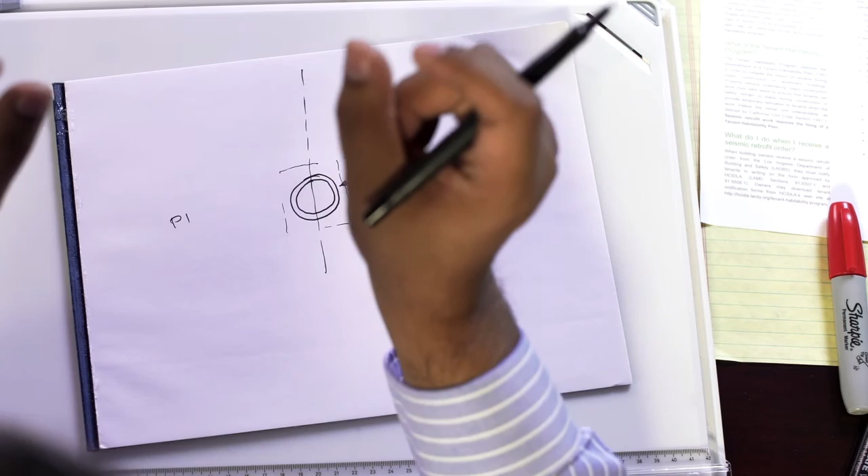But if instead of replacing, I add a new column, which is say an 8-inch tube, now I've created this area here, which is 6 inches plus 8 inches. I've created a 14-inch segment in there, which really affects the parking.

And so my choice is to replace, but again, construction costs are important. You need to get a valid price from your contractor, because I'm not the one giving you the quotation, I'm just giving you the design and the advice. Then you have to evaluate which is the right choice, replacement versus adding a new column. If you do a design build approach, you won't have much of a choice in this. The contractor will just give you the choice, and they'll do what is fastest for them.

So as we close this session, I want to give you some friendly advice so that when the earthquake hits, you know where to go. It's all about location. When an earthquake hits, we have no warning. It's all about whether you're in the right place at the right time. You can also be in the wrong place at the wrong time.

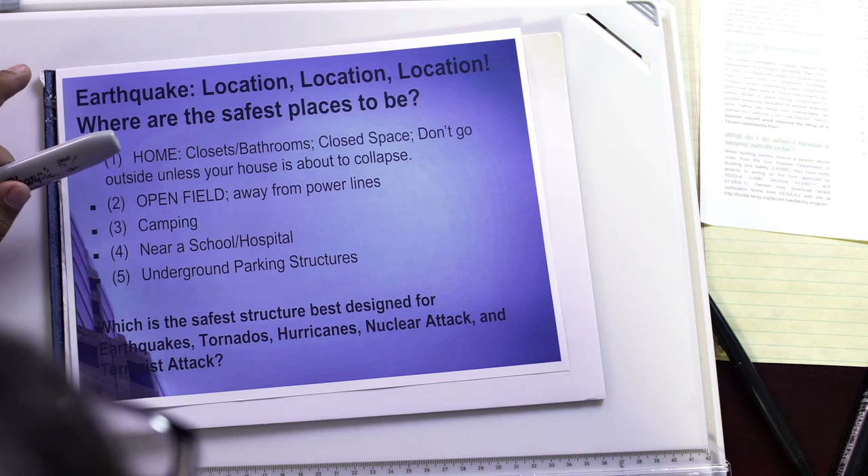So if you're at home, the safest place to be, believe it or not, is in a closet or in a bathroom, in a closed space. You don't want to be in an area with large beams and large floors or ceilings suspended over you, because they may collapse. Closed spaces, because the walls are nicely tight, have a higher probability of survival, not just in earthquakes, but we found this also true in hurricanes and tornadoes.

People that were in closed spaces would tend to survive. If you're outside in an open field away from power lines, that's a safe place to be. One of the best places to be is camping. You've got all your resources, hopefully your battery, your food. If you're camping, stay there, keep camping.

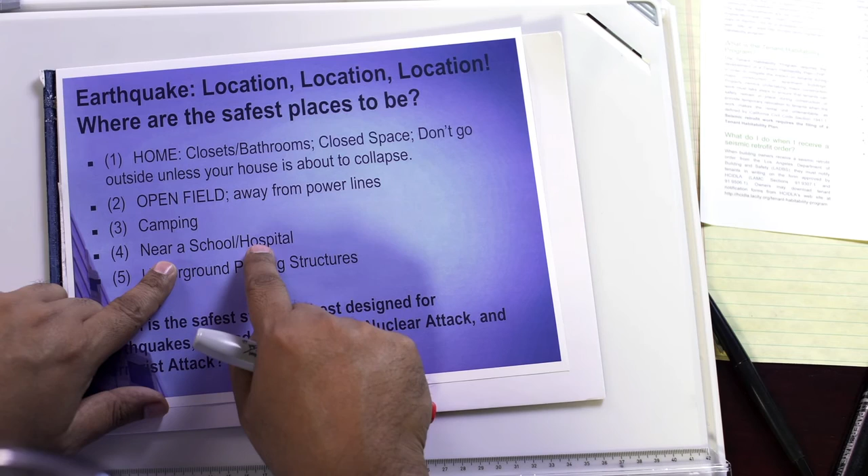If you're near a school or a hospital, the best place to go is the school or the hospital, because schools and hospitals are specifically designed at a higher standard to withstand earthquakes. Schools, hospitals, police stations, and fire stations. But a police station and a fire station will not exactly welcome you unless it's for the wrong reason. A school or a hospital is made as a shelter.

Another safe place is underground parking structures. They are great. If you remember your history in World War II, when the Germans were bombing London, where did all the British people go? They went into the tube and hid in the tunnels while their entire city was being burned, because the tunnels were the safest. So underground parking structures are very, very safe.

So let's get back to the question. Which is the safest structure best designed for earthquakes, tornadoes, hurricanes, nuclear attack, and terrorist attack? And the answer is prisons. Not exactly the place you want to be, but they are very well designed. They are solid, mainly because they're designed for keeping people in, not keeping them out. So not exactly your first choice, but certainly the safest structure. You'll be pleased to know that in the event of a cataclysmic earthquake, our inmates will survive us. We may not survive, but they will survive.